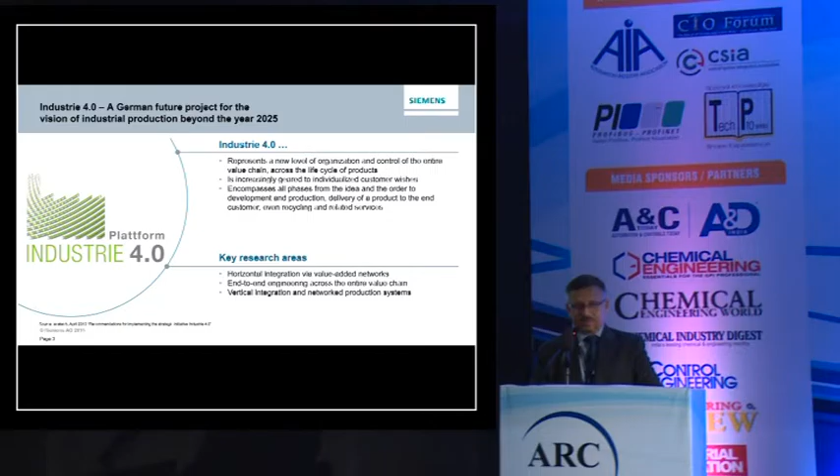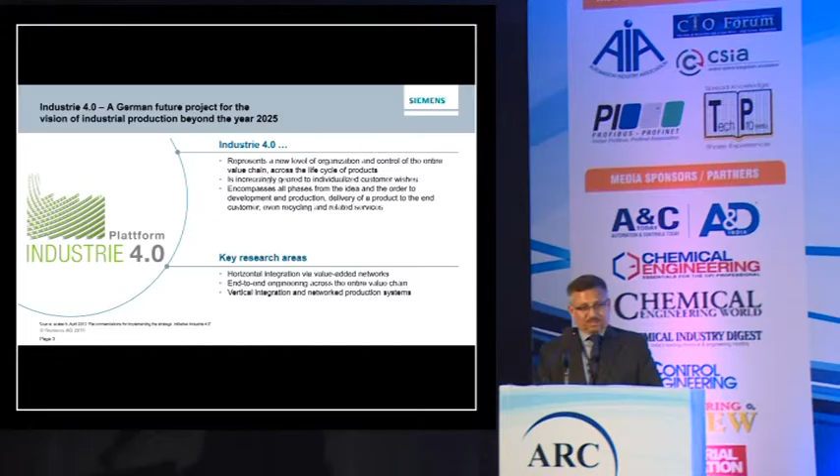Last year, we spoke about Siemens representing the same platform of Industry 4.0. My senior colleague, Mr. Samir Prakash, spoke about Industry 4.0. I spoke about digital manufacturing, if you remember. So what we decided this time is to go to the core of the issue and talk about the execution side. I draw attention to what Valentine mentioned, that we have to do small things and build those small things, then build upon the bigger dream of IoT and integrated smart manufacturing. There are many baby steps to be taken before we can call something smart manufacturing, done smartly, if I may call it.

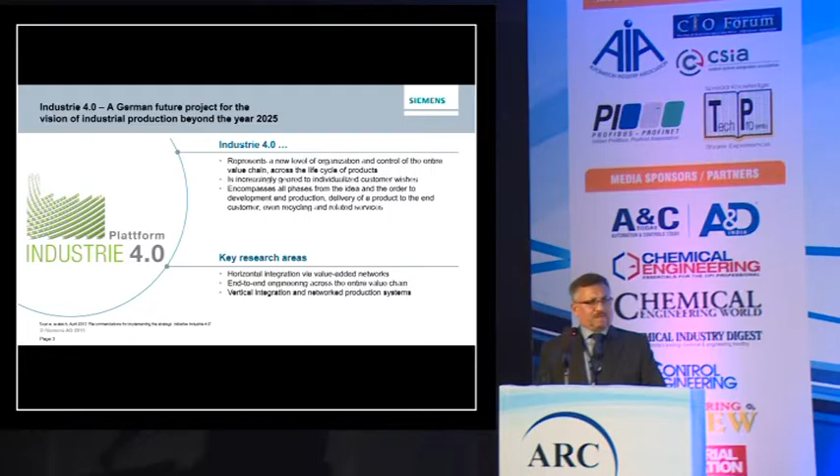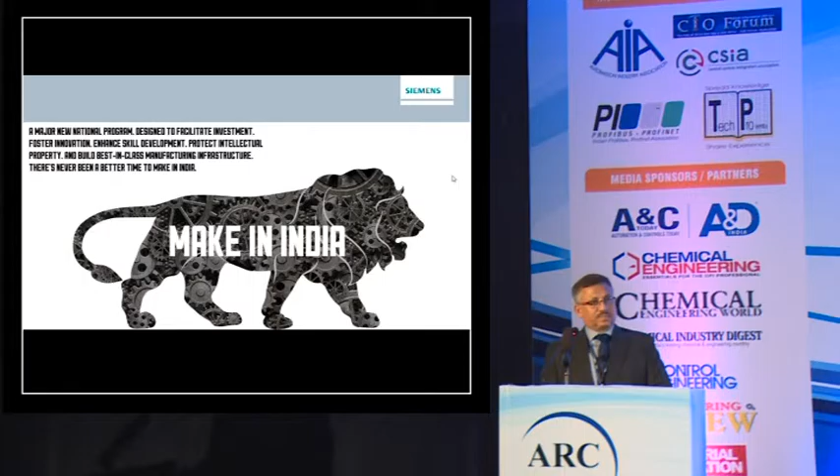So many things have happened over the last year since we met. Make in India - we all sat through a very heady launch of this important manufacturing initiative in India, followed by Digital India, and in a week's time, on 15th of July, Skill India will be launched. So both platforms on which Make in India stands would have been with us in the next 10 days, and that gives tremendous responsibility and empowerment to the people sitting here to make things happen, both on the skilling side and the digital side.

And today's presentation of mine is on digitalization. So I will move forward.

So again, let's set the context right. What do we mean by digitalize? Digitalization: make the digital thread a proactive agent in driving our business with a fully optimized digital enterprise.

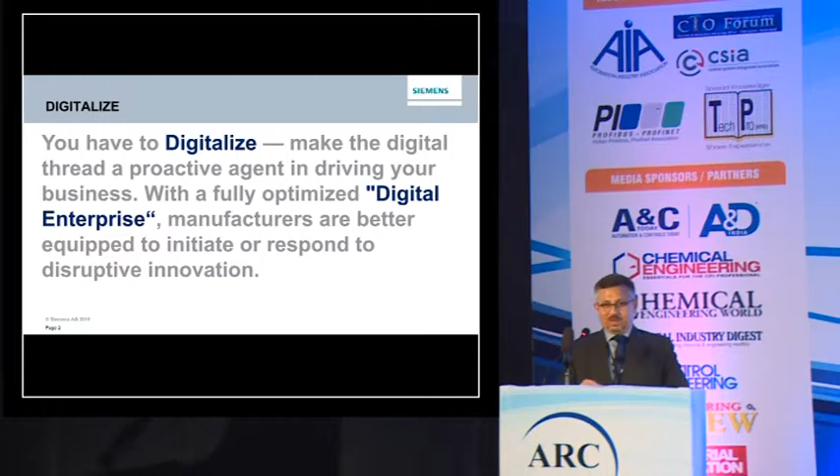At this moment, I'd like to draw attention to the first speaker, who mentioned that some economies are factor-driven, some are efficiency-driven, some are innovation-driven. It's the digital thread, the digitalization, that would make it possible for an economy to shift between efficiency-driven and innovation-driven. Think about it - if the economy is difficult, you can switch from an innovation-driven and investment-driven economy to an efficiency-driven one, where you can save money. And that is possible only when you have a digital thread.

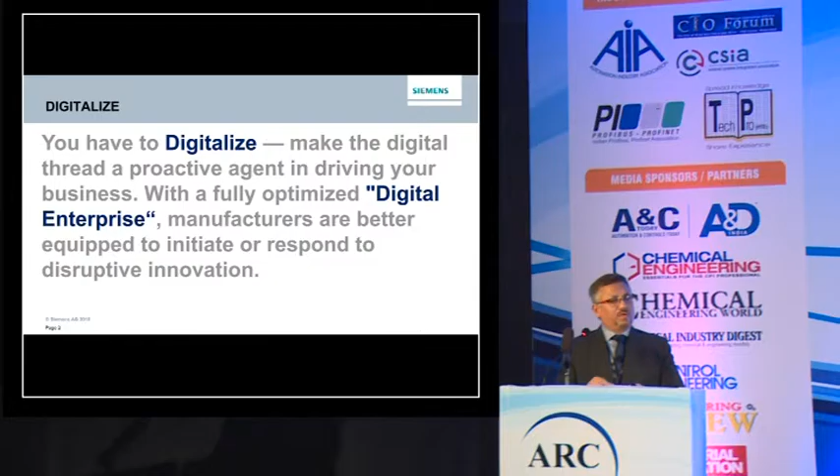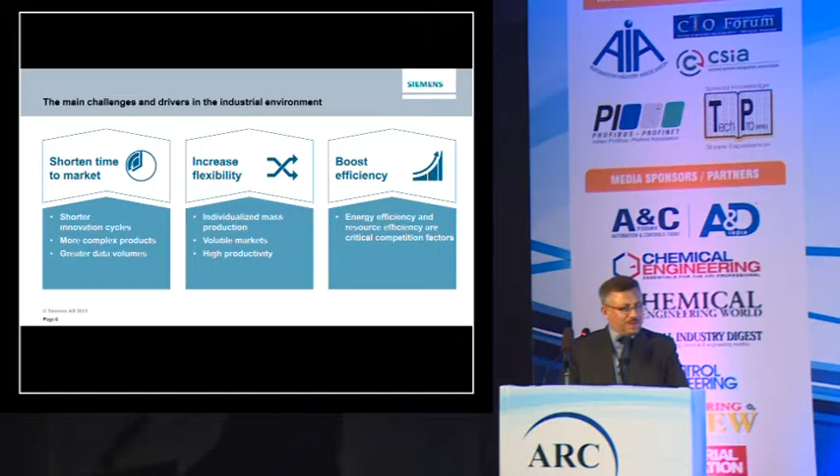And today I'm going to concentrate on manufacturing. We have seen this in the past - I'm not going to take you through every aspect of it. I think we've been talking about these dependence factors for many years now.

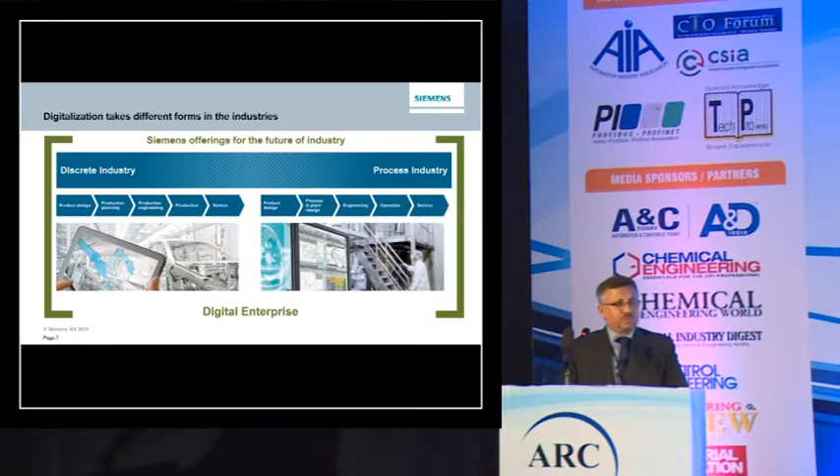There are two definitive areas that Siemens would be interested in sharing with the attendees here: one is discrete, one is process. I will leave process for my fellow speaker post-lunch. I would concentrate on discrete industry in this session.

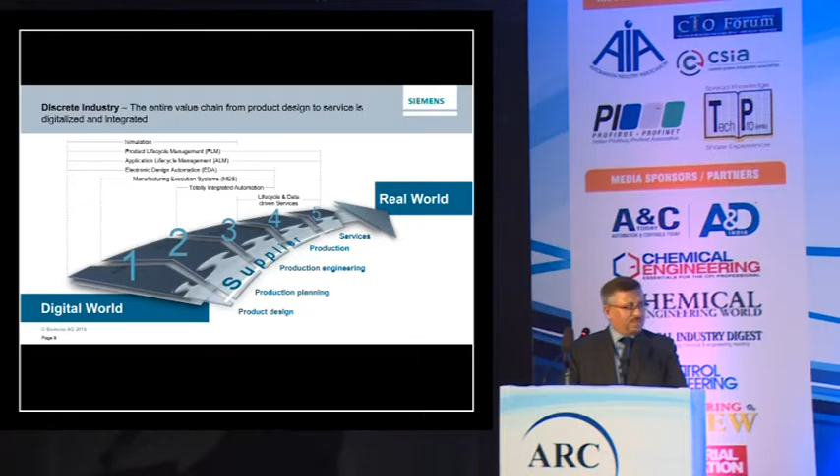This was the key slide last year when we presented Industry 4.0, mapping the digital world and real world and bringing them together - how simulation, PLM, application lifecycle management, EDA, and TIA, totally integrated automation, bring this handshake between the real world and the virtual world.

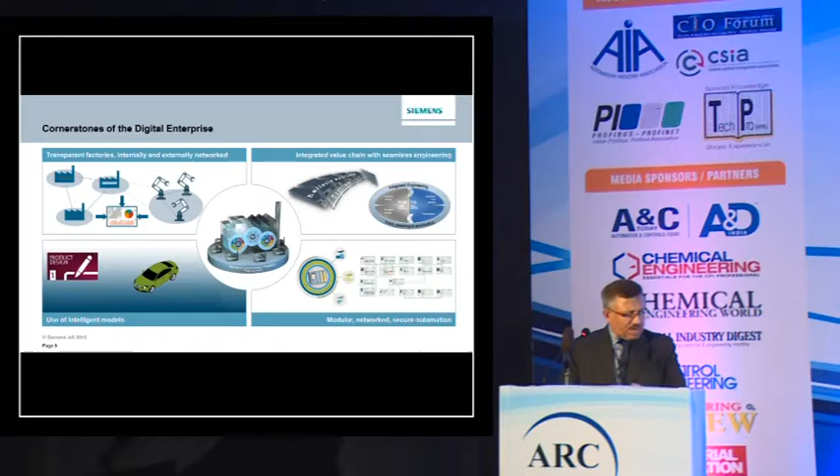As I said, this year I'm going to talk more about the execution, and I have taken an example from the automotive industry. That's because automotive is the most progressive vertical in India, and it sets down a lot of learnings and baseline references for the rest to follow. Whatever is true for automotive is probably true for others as well, with variations across industrial machinery, aerospace, defense - many of these things are pretty common, so we can drive learning from one to the other.

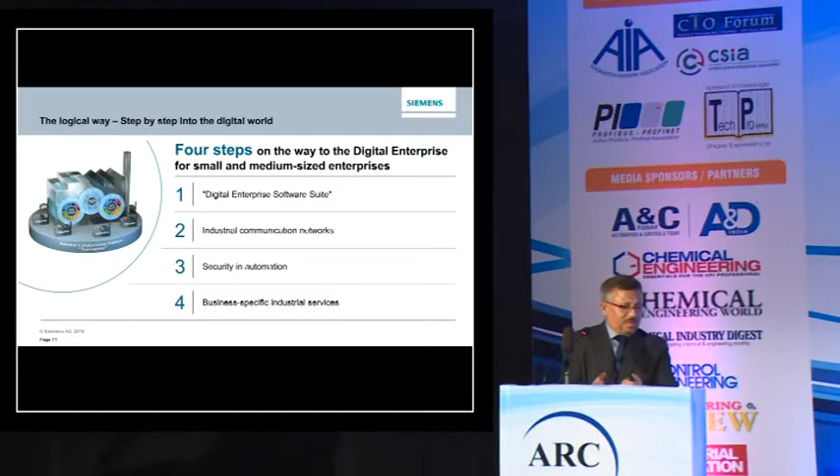The core of a digital enterprise lies between product lifecycle management, manufacturing execution system, and totally integrated automation. But let's leave these big words behind and go to the execution issues we should take as a mandate to champion in our organizations. There are 4 steps a digital enterprise in a small to medium business can adopt: digital enterprise software suite, industrial communication network, security in automation, and business specific industrial services.

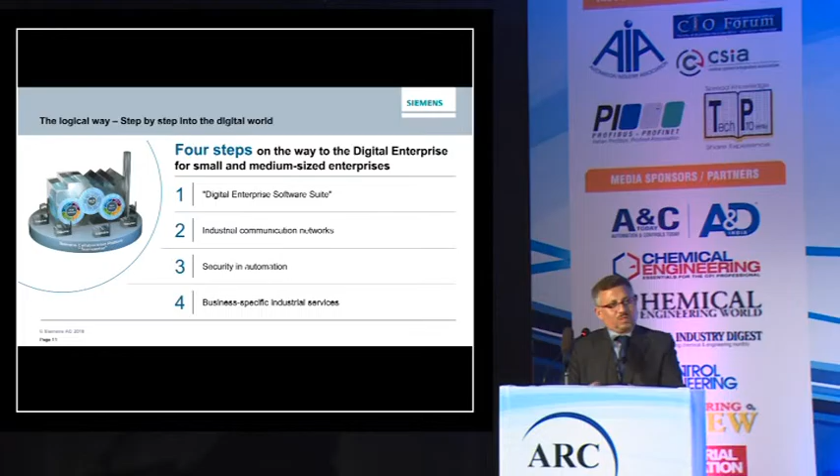Before we get into these steps, it's important to understand the product or services we offer to the market and the processes involved. Looking at the entire digital enterprise, from design to virtual production to real production, we're talking about computer-aided design, collaborative product data management, digital manufacturing, MES, and command and control. This entire suite needs to fulfill the digital thread for controlling your design to manufacturing.

This means we're in control of business, not just making it efficient and profitable, but more agile when it's time to change the product, launch a new one, or collaborate with new partners, services, suppliers, or IP owners. I just came from the Automotive Engineering Show in Chennai, where a youngster asked how I see the automotive and manufacturing industry changing.

I couldn't help but learn from how the electronics and computer goods market has evolved. The standards have evolved such that today we can put together a computer at home within a day, buying the best in class from the market. But we probably can't do that for an automobile today, and the reason is standards.

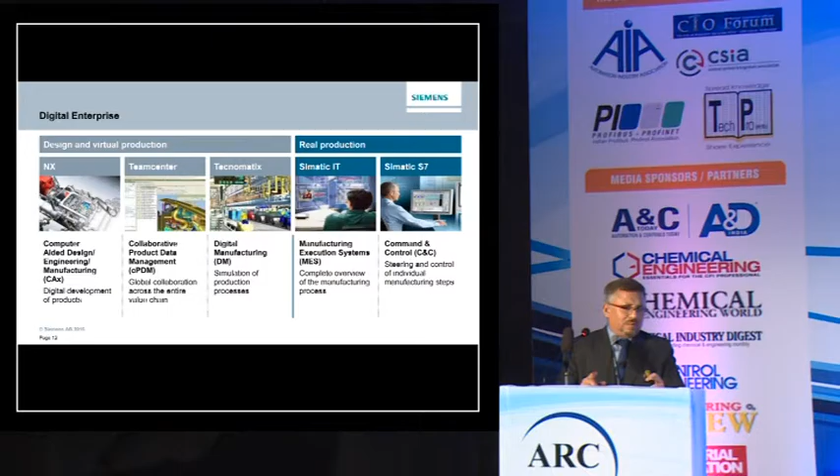But those standards are emerging. There will be a time, with the advent of higher levels of electronics in a vehicle and higher levels of standard equipment in a product called automobile, with a changed definition, that we can put together an automobile at home, buying the best in class.

And there would be another economy where automobiles, like computers, are produced by mass producers and mass developers, driven probably through IP owners at the first layer, then subsystem suppliers, then contract manufacturers. The business would be done on the edge of IP and process, if you understand what I'm talking about.

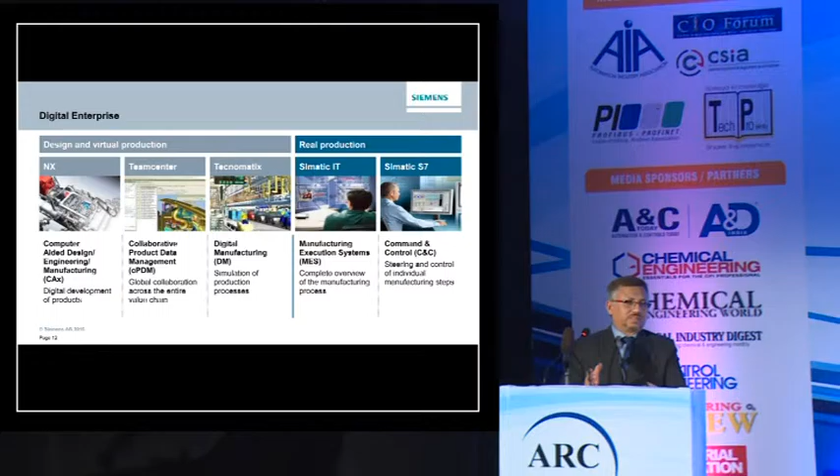Somebody, I think the first speaker, mentioned Apple as an innovative product. Apple is manufactured by a contract manufacturer today, while the process and IP is owned by somebody else, correct? So if we can be in control of our process and our IP, that's where another interesting question we faced yesterday comes in: how to compete globally.

We're of the opinion, and we've discussed this within Siemens quite often about India, that there isn't another place for another economy of volume scale industrialization like China. There isn't enough market to have another volume country emerging for volume manufacturing. That means we have to do something different.

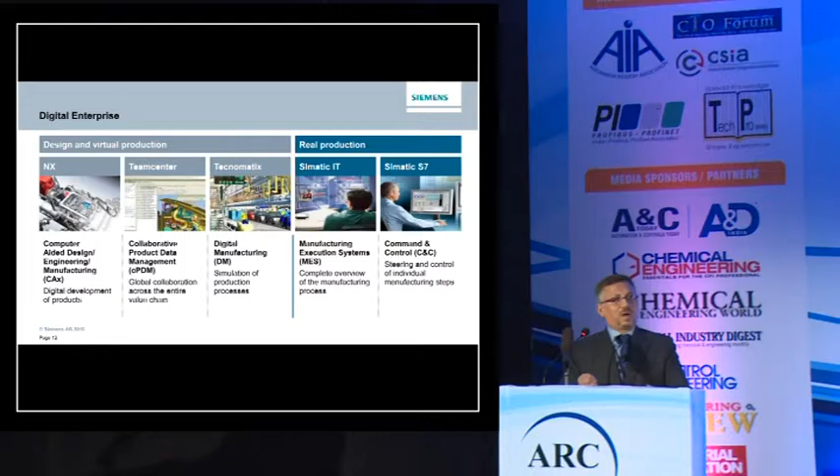We are smarter people, we have good engineers, we have a fantastic software workforce with us. We can make smarter products, which is what's needed in this world. That means integration of different verticals - electronics, mechanical, electrical, hydraulics - all put together, developing this digital thread from product development up to manufacturing, making it extremely agile, and supplying the world with smarter products, whether it be power, transportation, mobility, aerospace, or wherever required.

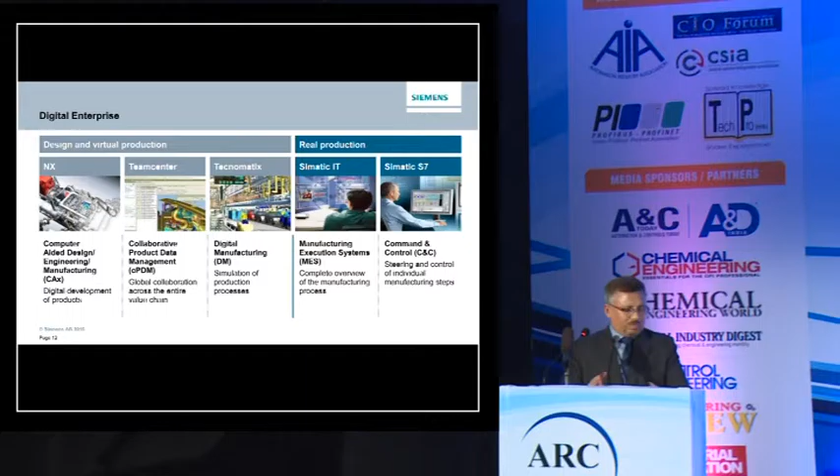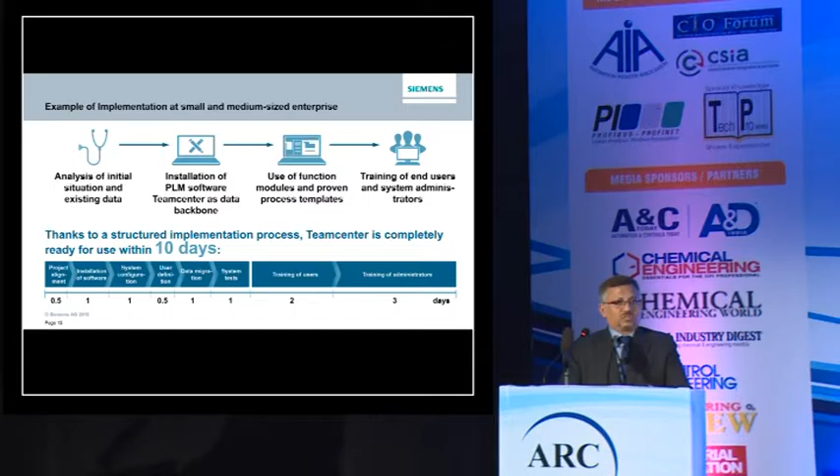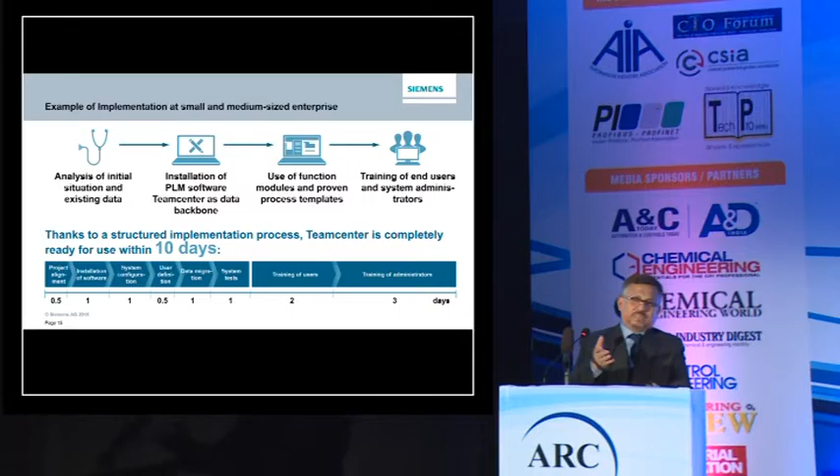With that background, I've taken one example to try to define how we can make our processes understood to ourselves so we can create that digital thread. Once I start that example, you'll realize the pattern, and whatever your business may be, you can go back and practice that and ask yourself where you stand.

Before I start, a couple of examples - some of them interesting. Red Bull, winner of 4 Formula 1 championships in continuation. Of course, fantastic drivers, fantastic product, but at the core of it, developed with Siemens solutions of the digital thread, by the way.

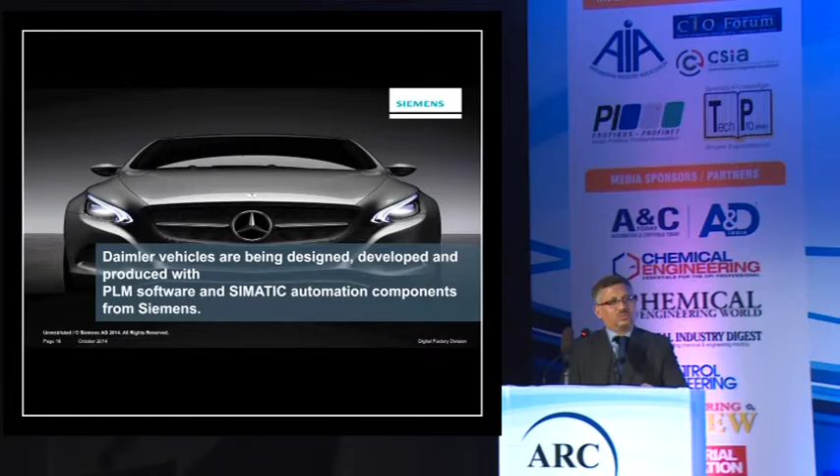Another company, Rowenta, makes consumer goods, again with the Siemens solutions and the digital thread. Daimler, including the R&D that exists out of India, design anywhere, requirements defined anywhere, manufactured anywhere, using PLM software and MES solutions from Siemens in making this world-class product, which defines a new baseline of standard product every year, every time it launches.

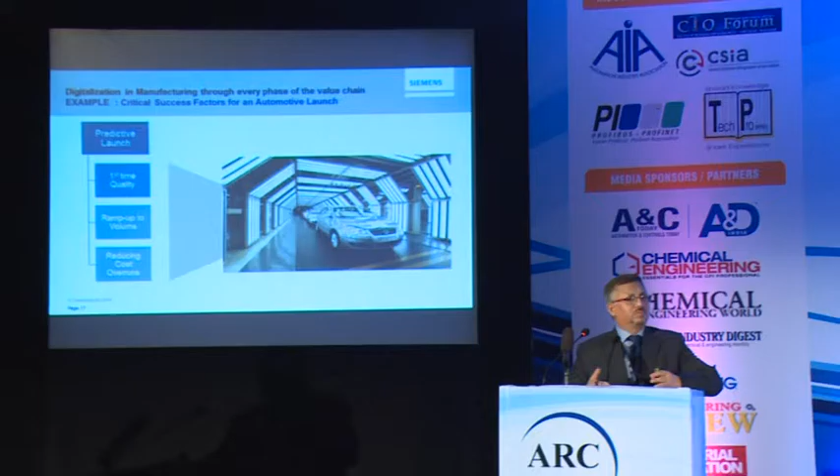So, taking that, let's look at an example of an automobile. As I said, time is not sufficient here to take all the products and all the verticals, so I have taken automobile.

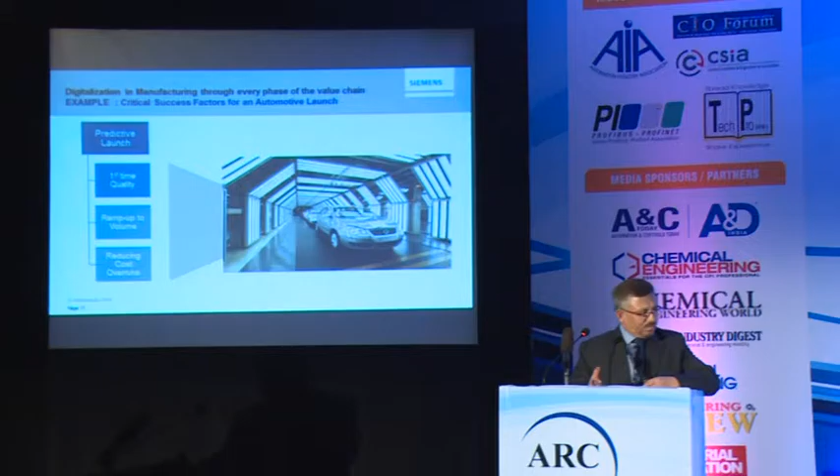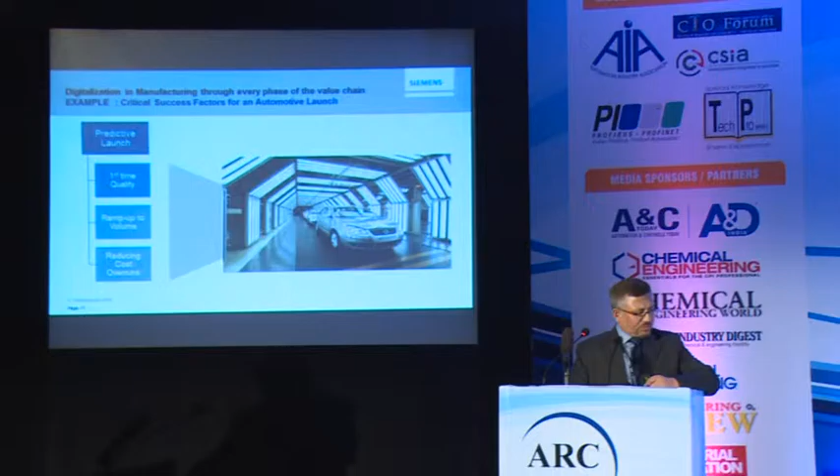Let's look at what are the critical success factors for an automotive launch. Do we believe that an automotive launch is a very important event? It depends on multiple factors, but the most important three that manufacturers and product developers have identified are first time quality, ramp up to volume, and reducing the cost overruns. To be able to control these three, they are able to control the launch.

There are many factors that are part of an automobile, and I will not be able to take all of them. I'm taking a few of them to show you how a digital thread can be drawn.

To begin with, let's look at powertrain. Now, the powertrain of an automobile is no different from a gearbox of a machine tool. It's no different from a mechanized back end of a food processing machine or a textile machine. So, draw your own parallels.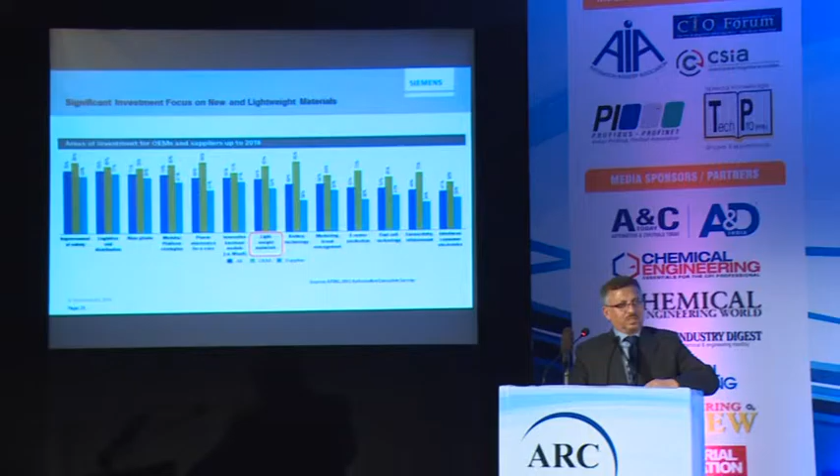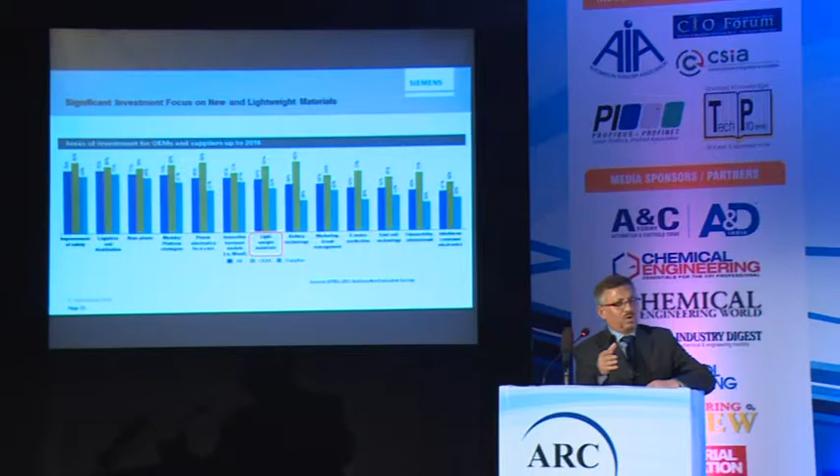What is the most important thing today? There are many factors, and I cannot take all of them due to paucity of time. I've taken one of the most important: lightweighting a vehicle. This is probably one of the most important driving forces today in the automotive final product. Lightweighting means reducing the weight of the body, reducing the weight of the powertrain, the gearbox, the entire vehicle, improving the fuel efficiency, therefore making it more comfortable, drivable, safe, everything that goes with it.

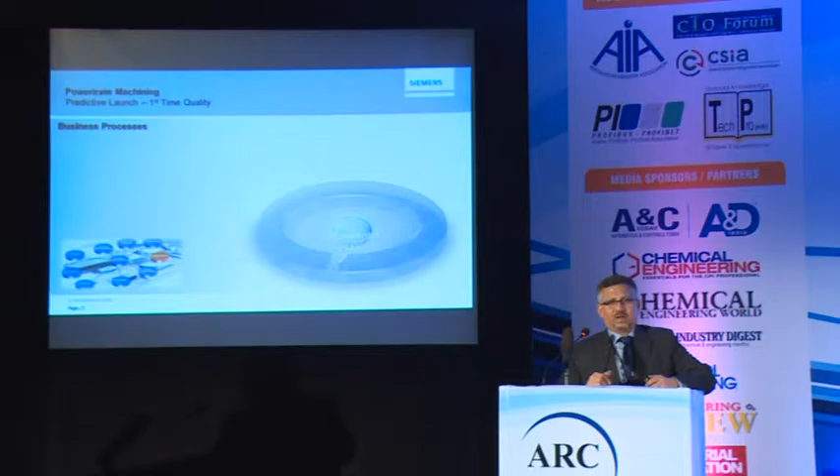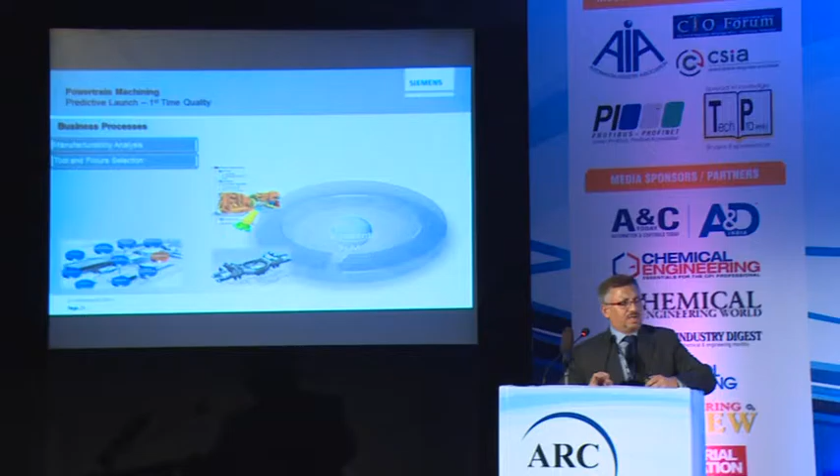What are the business processes? So step 1, after we have arrived at what are the trends and challenges that we have to face, what are the business processes that get impacted? Manufacturability analysis - there were a couple mentioned on design for manufacturing analysis, design for servicing analysis, design for maintenance analysis, design for quality analysis. So all those manufacturability factors are to be analyzed. That's the business process.

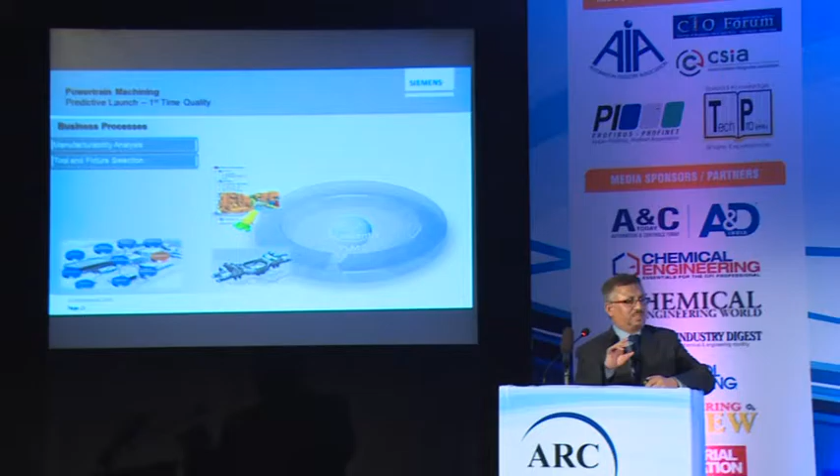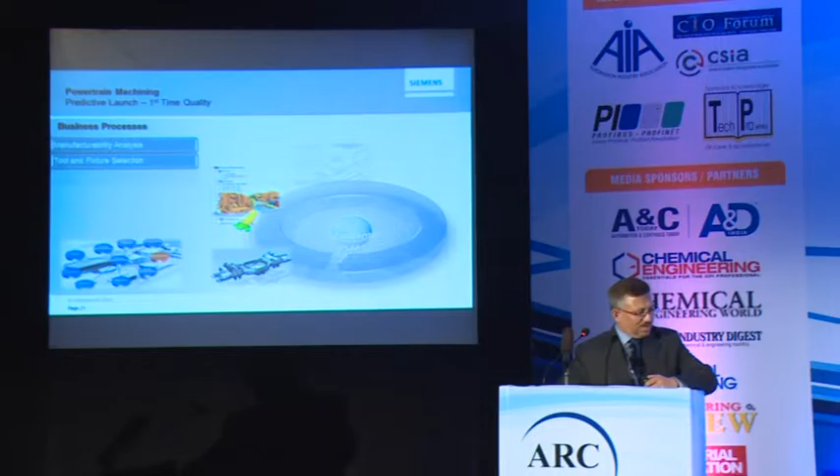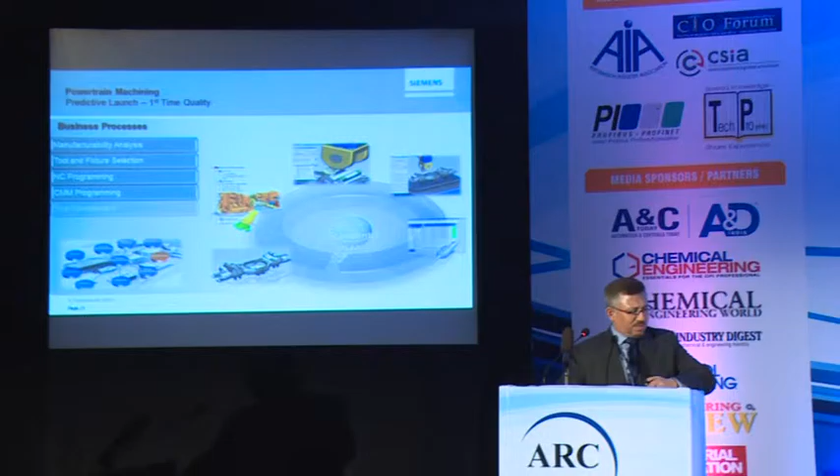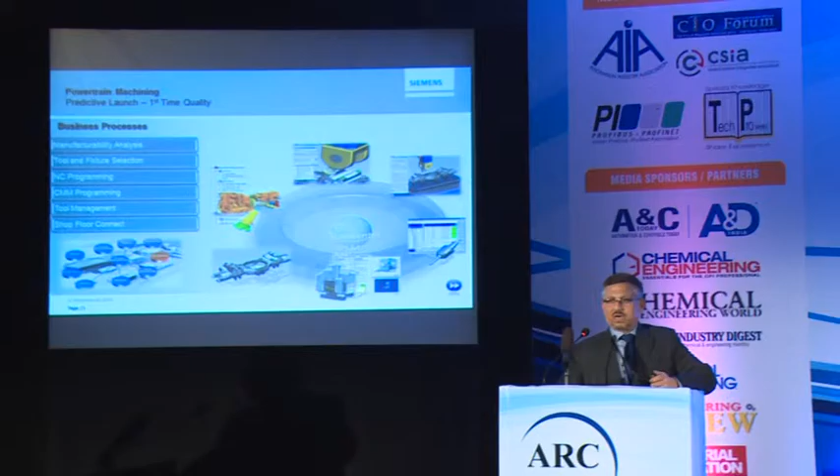These are the baby steps that we were talking about before we talk about Internet of Things and integrated manufacturing and smart manufacturing: tool and fixture selection, NC programming, CMM programming if you are getting into coordinate measuring machine because it's powertrain and very highly accurate components, tool management and shop floor connect. So these are the baby steps. If you really see the thread here, unless we have defined our bill of process and bill of material, it will be very difficult to start creating a digital thread for a powertrain.

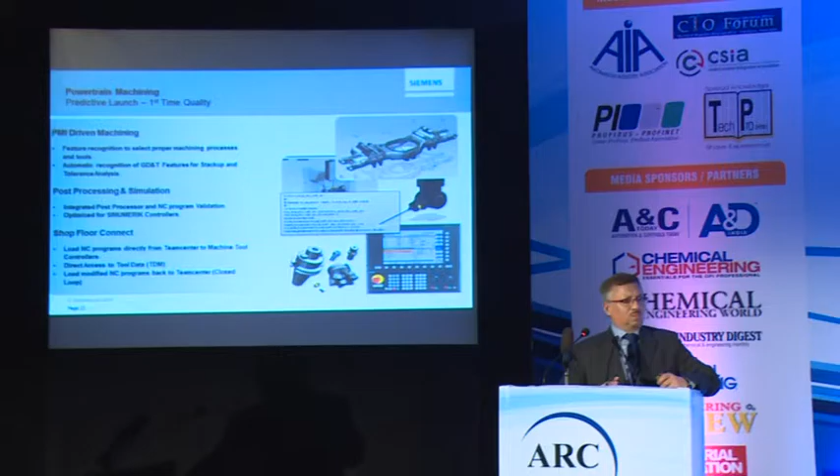Correct? I'm not getting into the details of it, but there is a one layer deeper explanation of the business process. Let's say manufacturing - what kind of manufacturing part measures that you have taken and defined while modeling will define the automated process output of those. These are the factors which today we are doing entirely manually, except for very few high-end companies in automotive and probably a bit in aerospace. Most of this work is being done in India manually. Manually people are defining what manufacturing should I do, what process should I adopt to be able to arrive at this accuracy. Whereas these are things that can be defined and need to be defined if we have to create a digital thread.

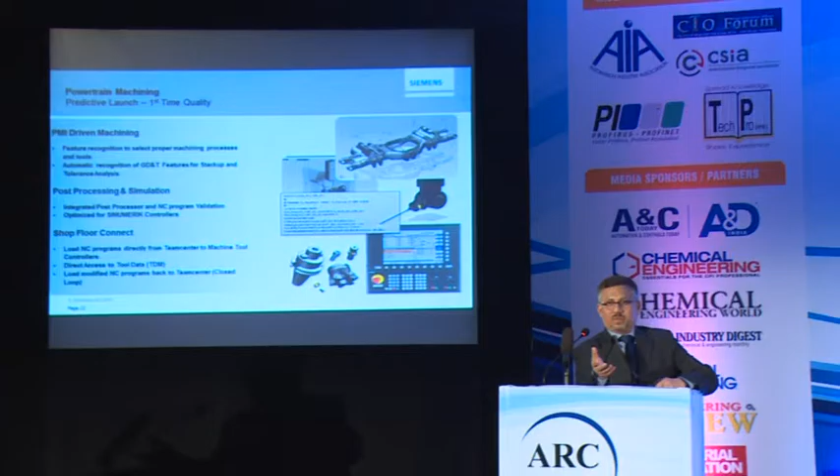Because again, as I said, digital thread means people who do this repetitive work, do it and control the IP of the process, which drives the product development and product manufacturing, rather than concentrating on a product process.

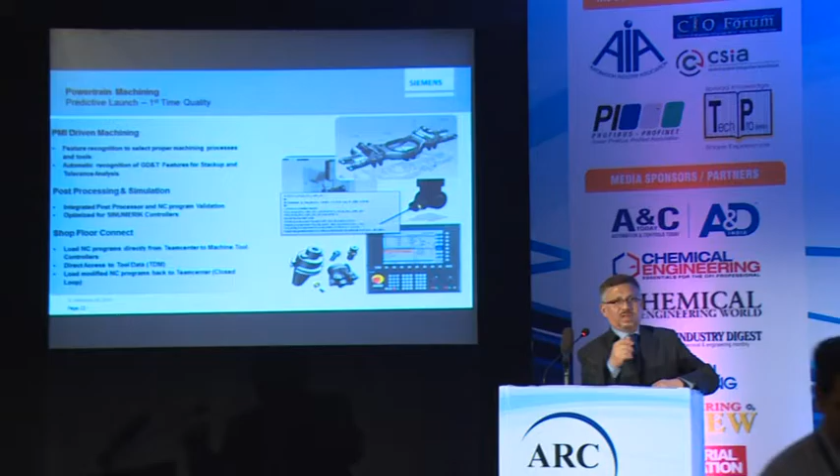Authoring a product process, manufacturing process - they are creating the knowledge for the company, and that knowledge stays because those are referable and can be used for the next version.

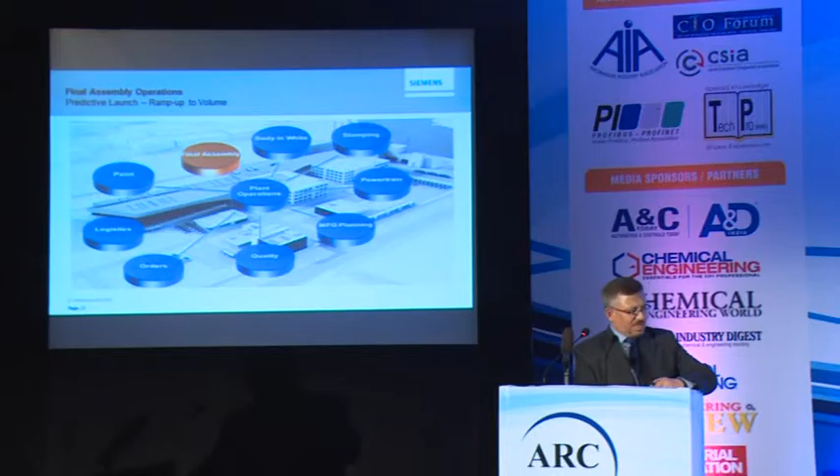Let's look at final assembly. Final assembly is where all these components and subsystems come together in an assembly line in an automotive.

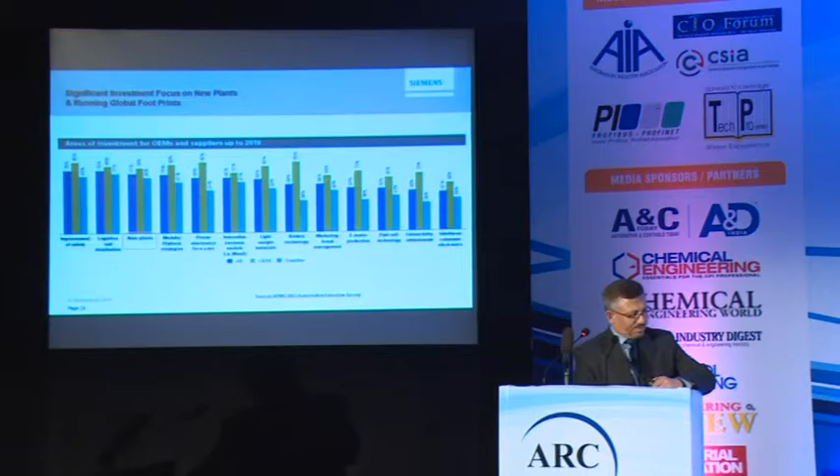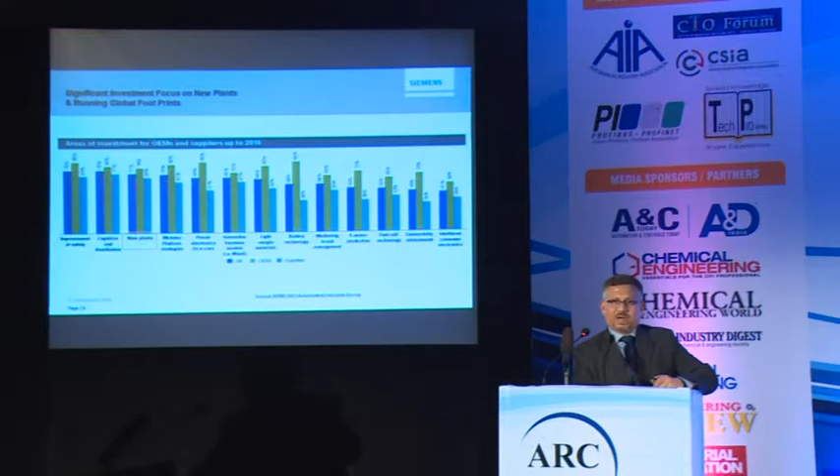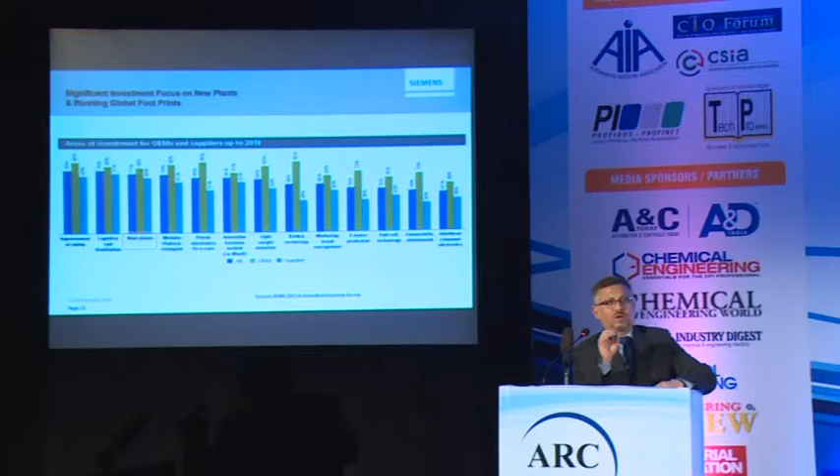What is probably the most important factor in a final assembly? There are many, and I have picked new plants. What does new plants mean? One thing you must have noticed in recent 15 years is that lots of automotive manufacturers in India are going very near to the customer for manufacturing.

So Hero Motors had a 25-year-old plant in Dharuhera and in Gurgaon. They replicated in Rudrapur. Now they are talking about doing it in Gujarat. They will be talking about doing it in the South. They have created very efficient manufacturing processes over the last 20 years.

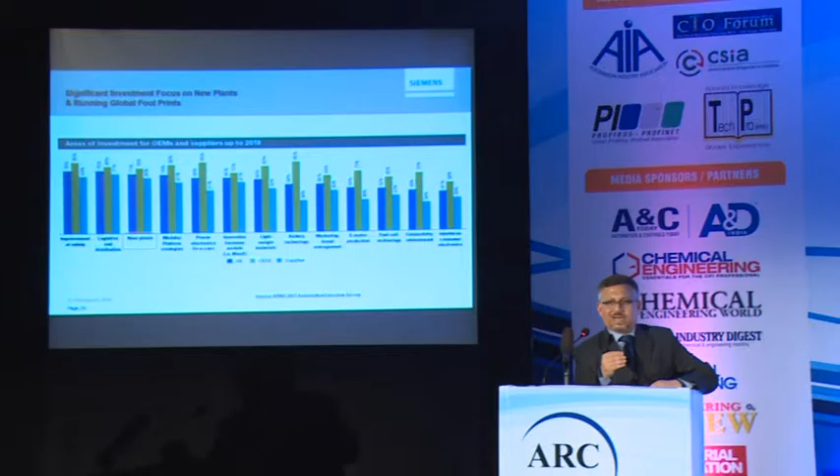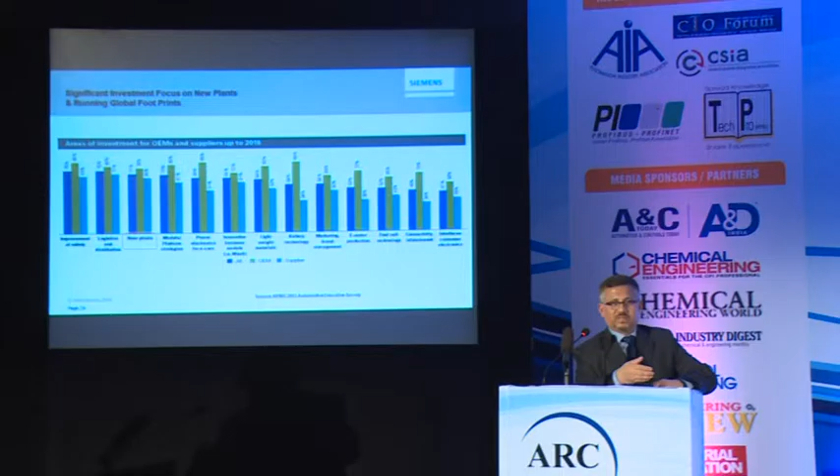Now is the time for replicating it in the new plants. They can't recreate those process improvements, so replication is the challenge for them. That's what new plants is all about - implementation of those processes that you have already gone through.

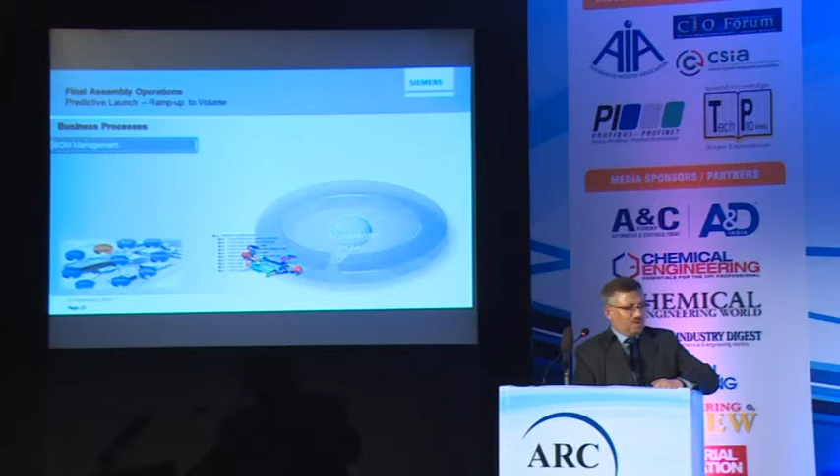So what are the business processes that a final assembly operation depends upon? Bill of material management - when I say bill of material, I mean engineering bill of material - and bill of process management, which is the derivative manufacturing.

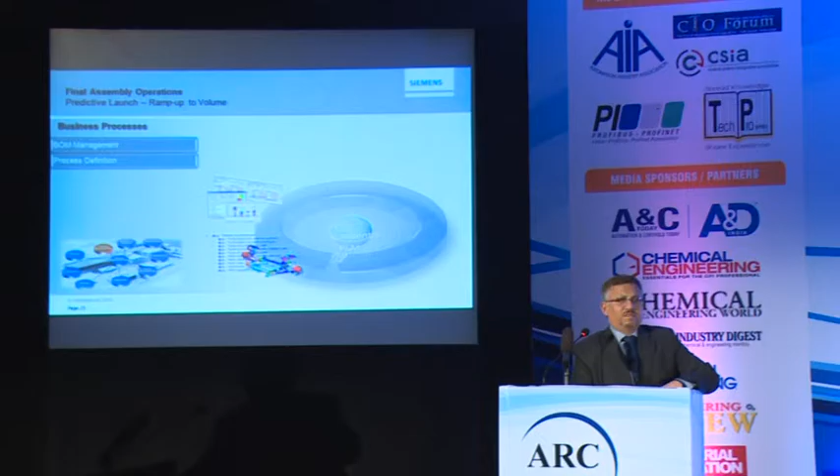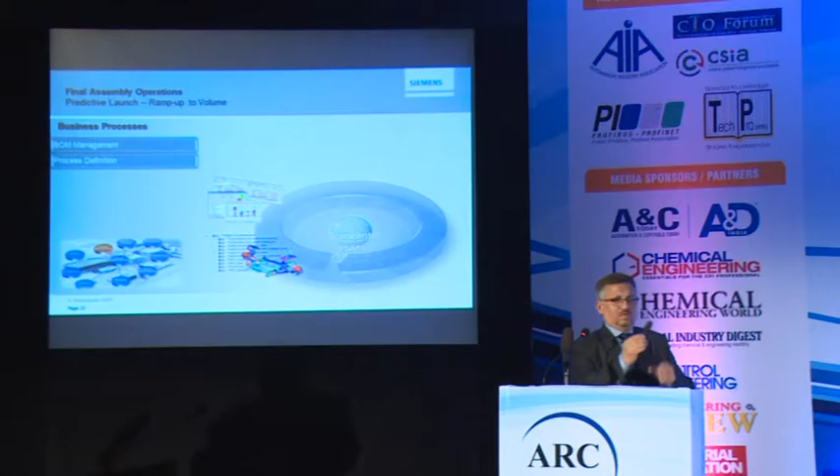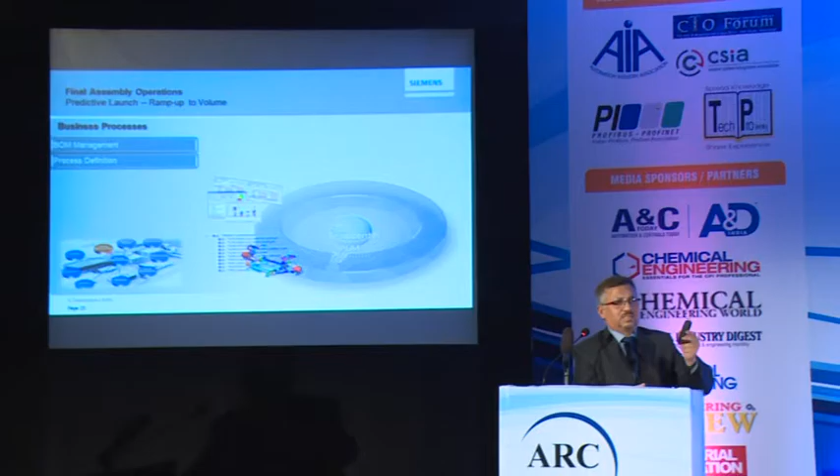Those who are part of automotive, can anyone guess how many manufacturing bill of materials at an average exist with respect to a single engineering bill of material? Let's say an engineering bill of material for this would be this body, some 20 odd parts - that's the engineering bill of material, what the designer makes. Guess how many manufacturing bills of material exist for an average vehicle? About 60 to 70.

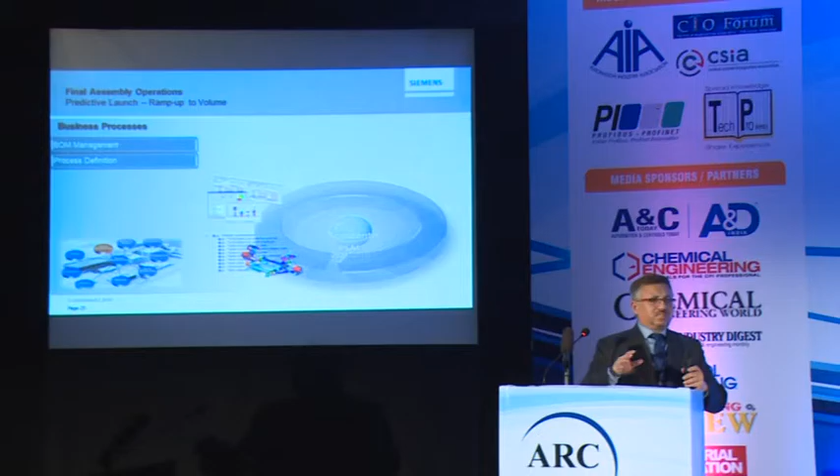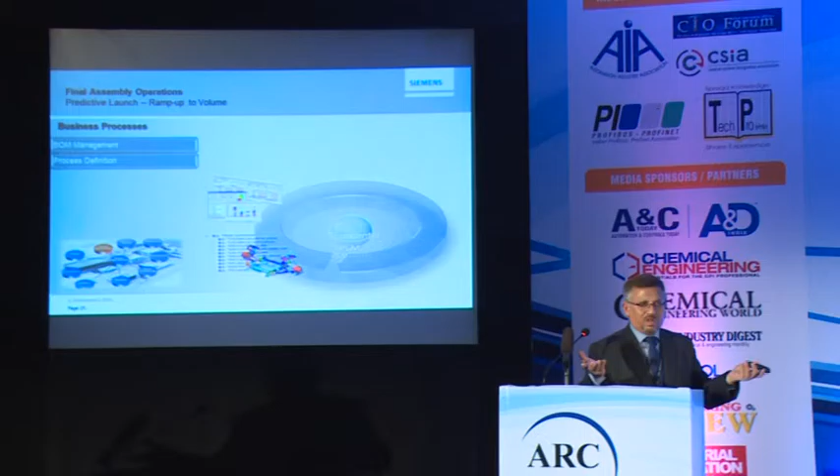That means if there is one design change, 60 to 70 bills of process, manufacturing bill of material, need to be changed in parallel. The reason is simple - in some plant this part comes as an assembly, in some plant this part comes separate, so you have separate manufacturing bill of material. Just to give a thumb rule to it - that's the complexity of this.

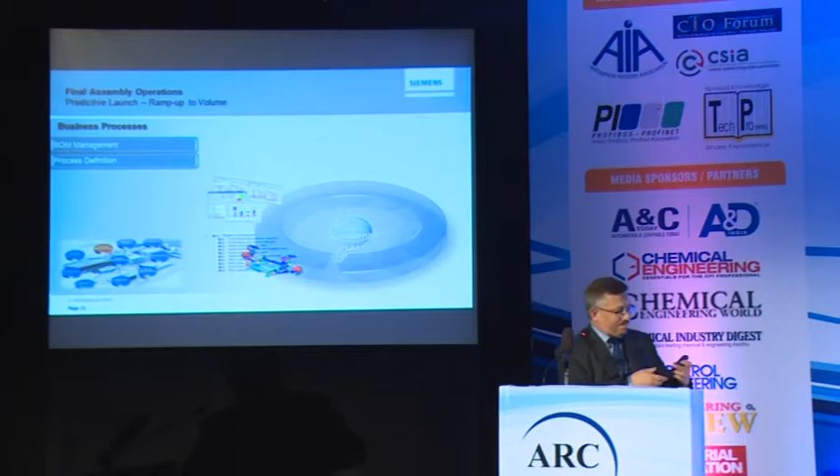So unless we define our manufacturing bill of material, it's very difficult to create a digital thread - the tools and equipment that go with it, layout planning and costing, process validation. If you don't have a process, there is no process validation. If you have a process, then you have a digital validation, and then you can create the digital thread of the final assembly operations.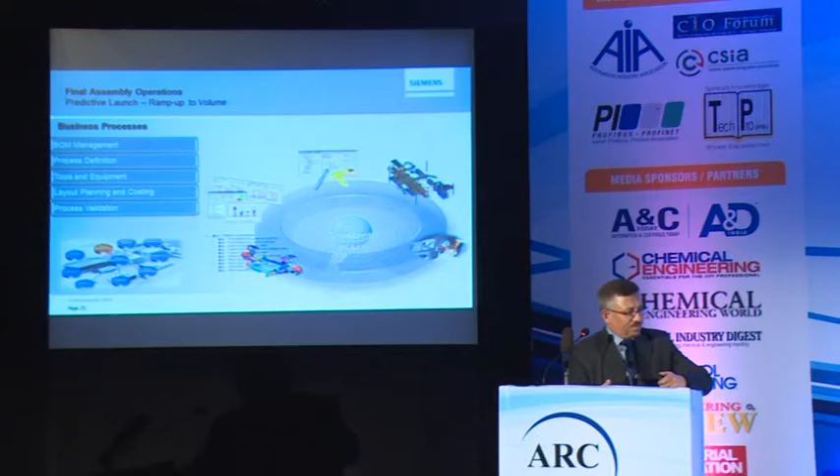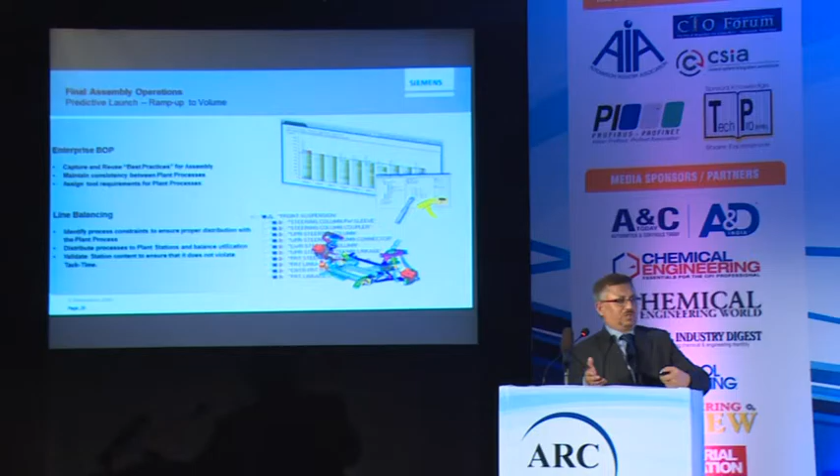And then, of course, production support through MES and TIA, as I just explained. So again, I'm not going to go through it, but with every new product, a shop floor manager has to do line balancing. I wish everything in this world took equal amount of time - then there was no problem, but it does not. Operation A takes longer, operation B takes lesser time, so you need to have buffer if you have to maintain a flow of manufacturing. So line balancing is important.

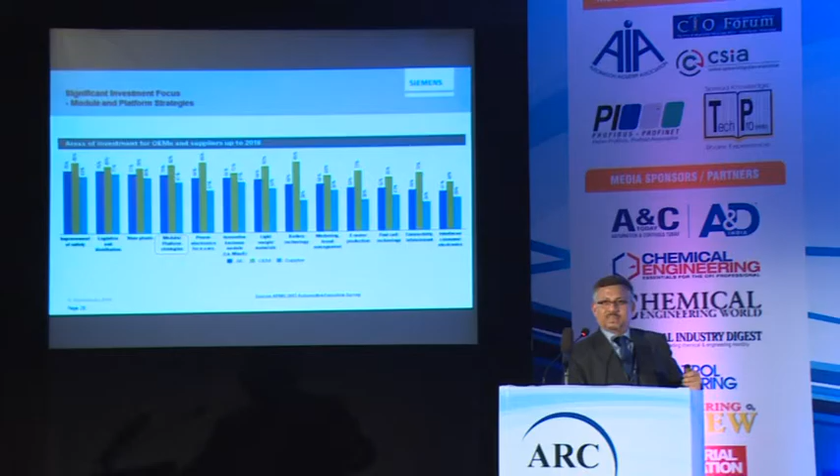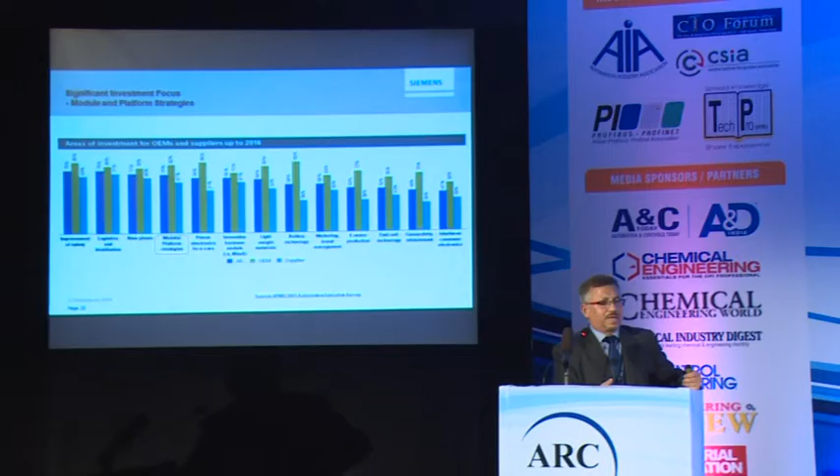Last example I'll take is body in white. This is probably the most expensive part of a vehicle, where it is assembled, welded by robots in an assembly line. One of the holy grails of vehicle manufacturing body in white is to make multiple models on the same line. That way you save a lot of money, because every line costs millions of dollars.

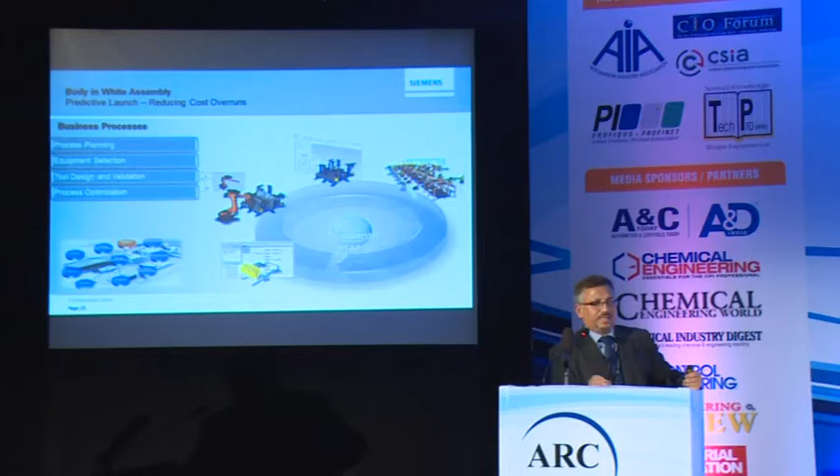That is possible only when we have business processes of process planning - equipment selection, meaning robot selection, gun selection, tools and fixtures selection, PLCs integrated, process optimization defined, and virtual commissioning of those machines offline on a computer. And then we start making the digital thread from the process to the assembly and to the infrastructure that we would require.

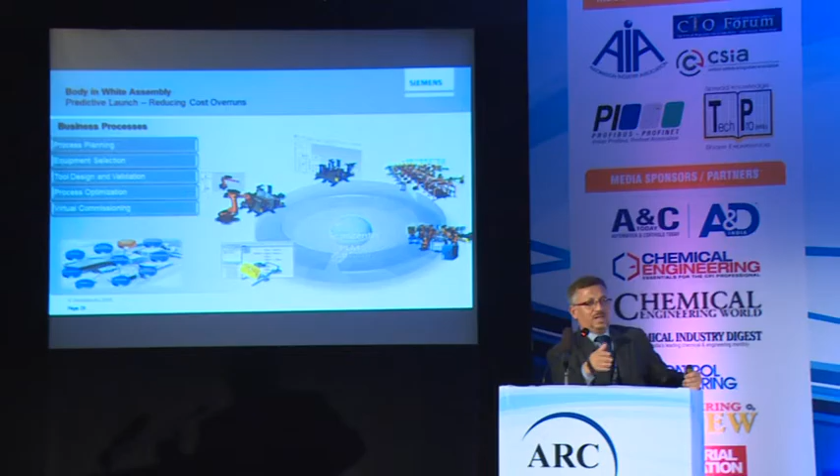So coming to the end of it, I just finished my 20 minutes, so I had to rush through. These three are only examples. Within your respective organizations, there would be at least 15 to 20 digital threads on average that you need to optimize. Maybe you start with 1 or 2, and quarter after quarter, make a plan for the digital thread you would define slowly, so that we can get into the smart manufacturing mode, and Industry 4.0, or whatever we adopt in Make in India and Digital India, is made successful with time and effort. Thank you.